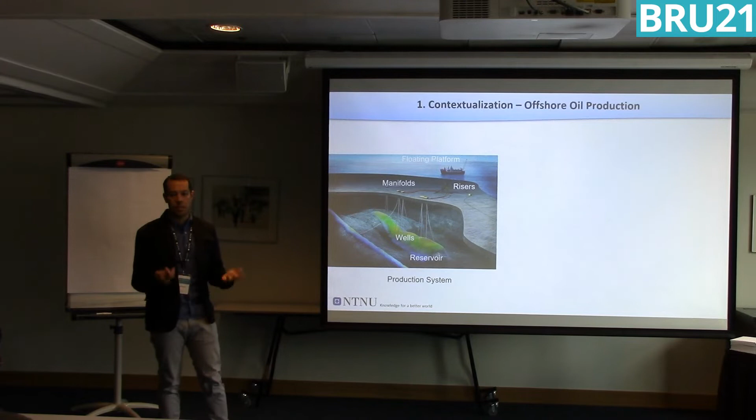Then the production is directed to the manifolds and to the pipelines, and then they flow up to the risers. There in the platform, there is the processing facilities, where the production is split into gas, oil, water, also for treatment, and so on. So this is more or less the production system. What we do, if you look at the schematic here, is try to represent how this looks like, and what sort of model we used to represent this.

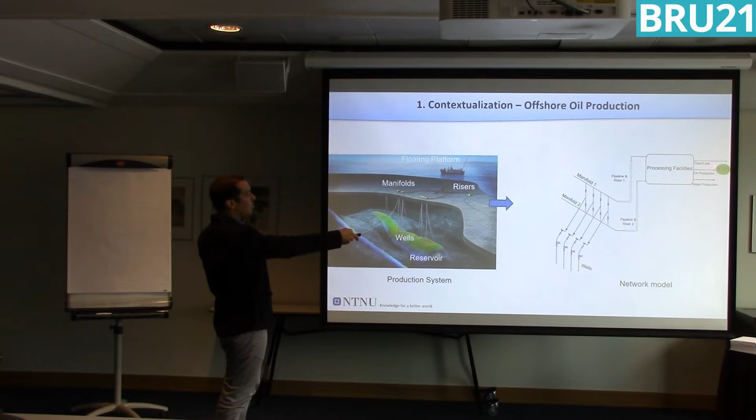We are basically looking at the network. We are assuming that there is a relationship between productivity, using IPRs to represent how the wells produce, and so on. Then all the network, all flows, etc., is represented by a bunch of pipelines and connections, like valves, etc. The overall goal is to maximize the oil production daily, which we represent with Y. Of course, you need to take care of constraints in the processing facilities, for example, water handling capacity, liquid handling capacity, and other constraints. That's more or less the scenario.

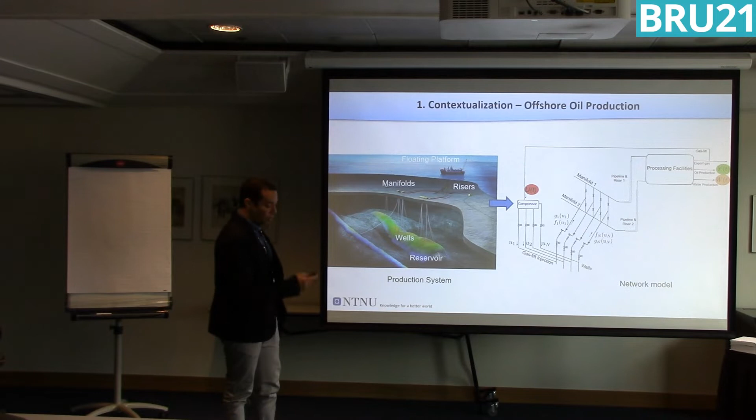In many situations, in many systems, what is done is that you extract a portion of the gas that you produce, and then you re-inject this gas into the wells. This process is called gas lift. It's an artificial lift mechanism to boost the production, or in some cases, even to enable the production. Then you basically have a compressor, and then you have the total gas, and you need to split the gas basically into the wells.

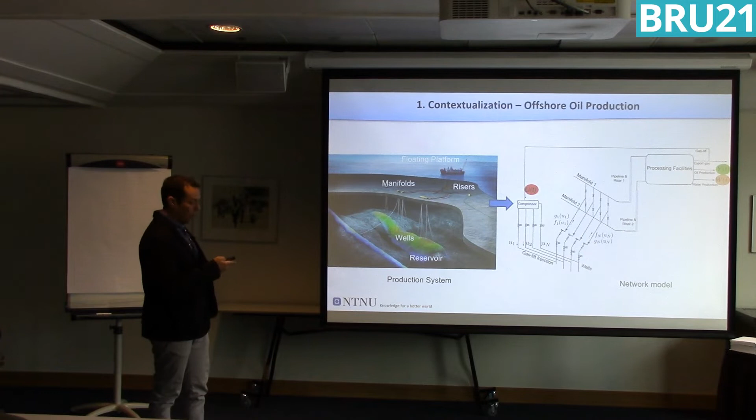If we look now into the problem formulation, what we want to achieve is basically how can we maximize the total oil production, given that you can, for example, steer the gas lift rates, how much to allocate of gas for each well. Of course, you need to respect the system constraints, for example, the water production that I just mentioned before. So this is a setup, and how to achieve that can basically be put in the framework of optimization.

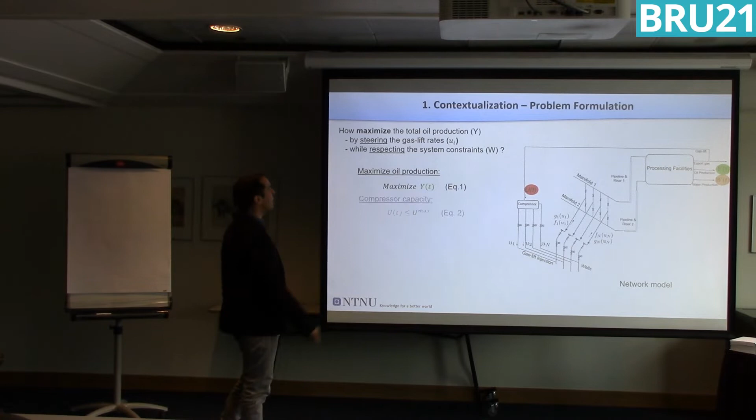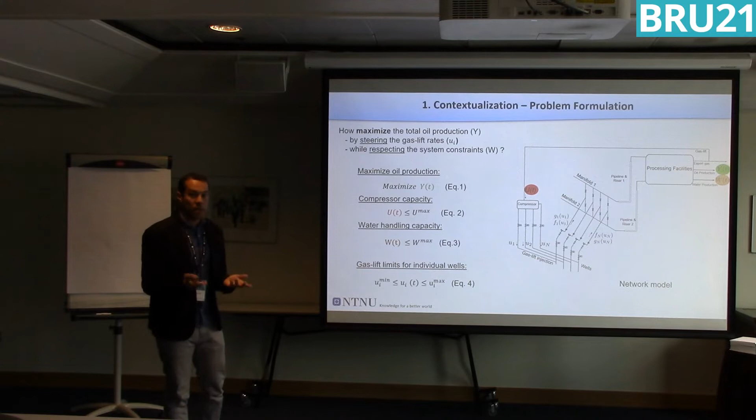You can frame it as an optimization problem. You basically have the objective to maximize Y of T, the total oil production. Then we have some limitations on the compressor—in this case, a maximum capacity of the compressor. We also have the water handling capacity, the total water that can be handled at the platform. And at the end, we have limits for each individual well. You cannot inject more or less; there is a region you should stay within, because if you inject less, you can produce sand, for example, or if you inject too much, you can wear the equipment. So there are physical limitations.

Before we go into the proposed method, what is the current state of the art? What you can do is, given the whole scenario, you have models to represent all of that, and you can do what-if analysis. This is really typical—you consider certain scenarios and test with your models to see what's the outcome. And then you can make use of first principle models.

You can also use data, but in a sense, it's all about trying and seeing what would be the outcome of a scenario, for example. And then you can also use optimization, but typically it's really hard to couple that with real-time data. And there are some spin-offs working on that, as we saw before. But I can't say that's standard technology being used yet, right?

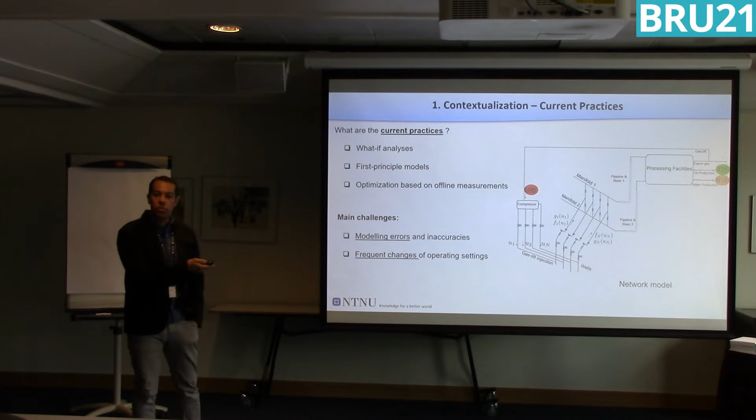And the main challenges in these practices are basically modeling errors. So you can build models, but it's really hard to maintain these models and to be sure that the accuracy of these models is good enough. It quite often happens that you find a good solution, but the operating conditions change, and then whatever you found before doesn't make sense anymore because you have a well that is clogged or whatever. So you need to take into account these changes in operating settings.

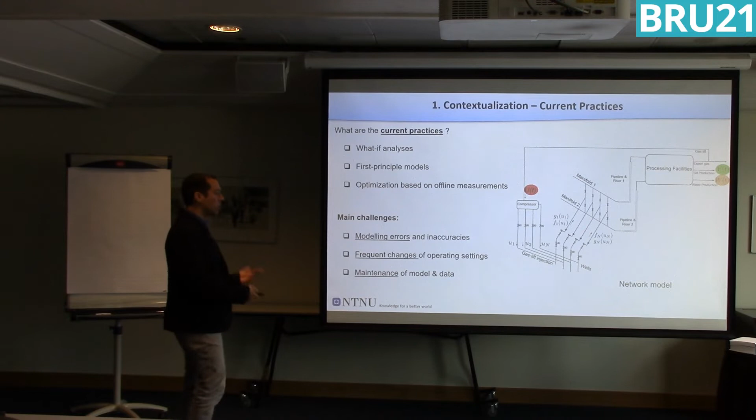And also, as I said before, maintenance of model and data, right? How to make sure that you always have up-to-date models. So these are the challenges, I would say. And now we go into the proposed solution in this work. We basically thought that we can use optimization, but we can try to avoid all the problems and issues that we presented before.

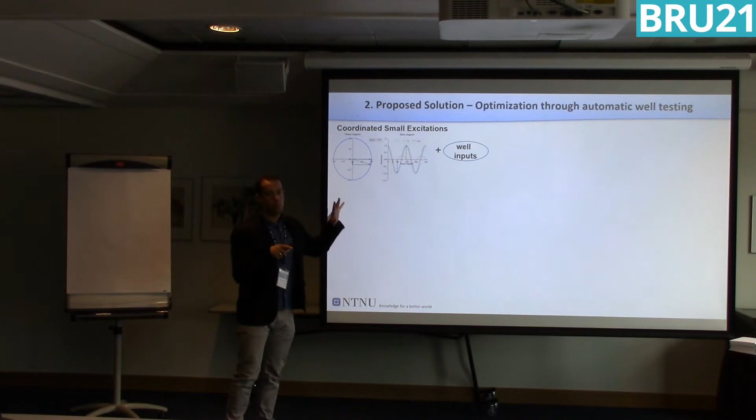So instead of using a model to represent how the system behaves, we decided to do something else. Let's try to use small excitations. And here I'm just showing some sinusoidal signals. And you can see that you have some degrees of freedom. Suppose you have one for each well, right? So depending on how you introduce the excitations, they can be coordinated in such a way that the total disturbance can be zero or near zero, right?

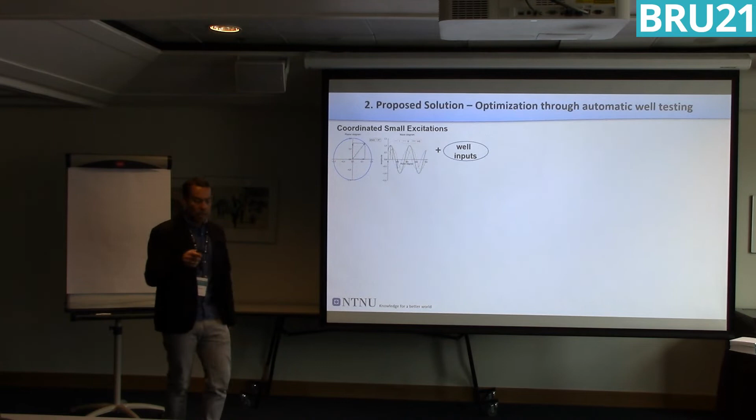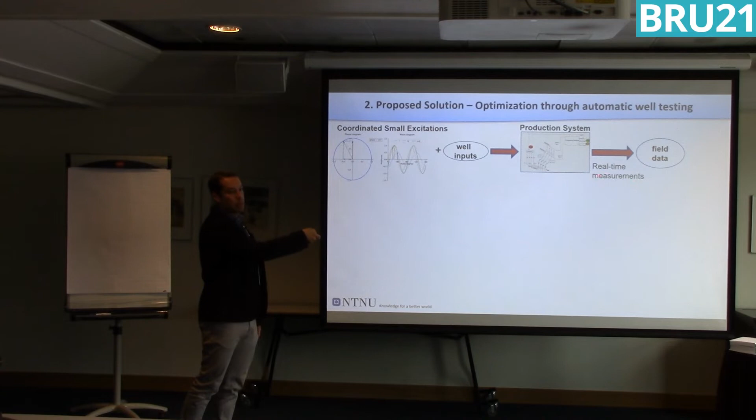And the whole point is that by adding some small excitations to well inputs, and applying that to the production system, when you have the real-time measurements in the system, then you have some field data that can be fed into an automatic optimizer. I'm not going to go into details here, but this optimizer can basically do adaptations in two ways. One is adapting the excitations themselves, and also the well inputs. And this whole thing doesn't depend on a model. So you are actually exciting the system, measuring, and moving. So that's the whole concept.

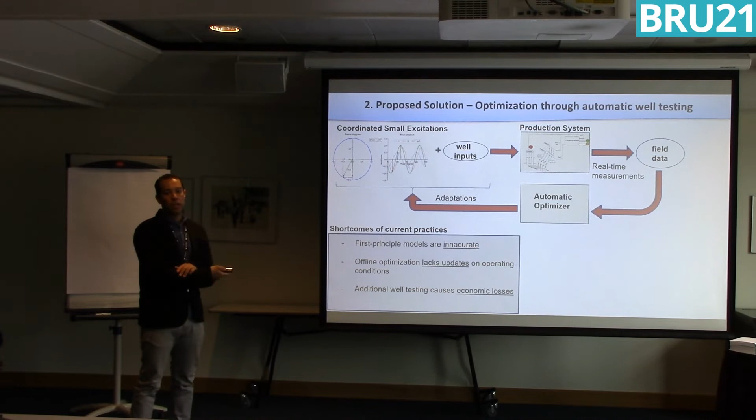And if you come back to the current practice, we argue that the models are inaccurate. It's hard to maintain everything up to date. And if you start doing more testing to get more data, then it's quite costly. You need to stop some wells and so on. And this is very challenging. So with the proposed solution, we argue that you don't need to stop your production system. You can do excitations continuously. And based on real-time data, you can do the optimization continuously without the need to stop.

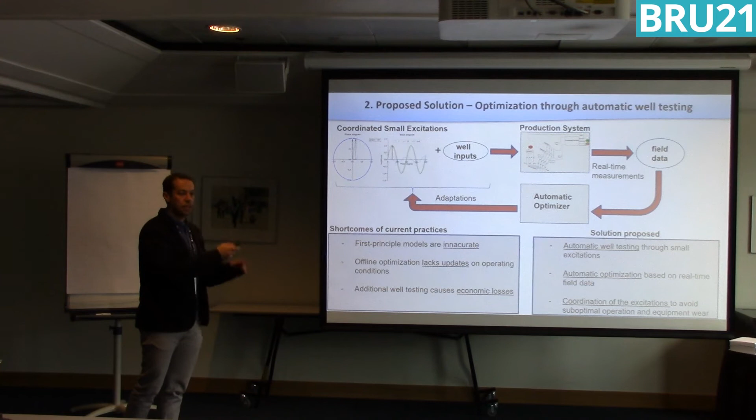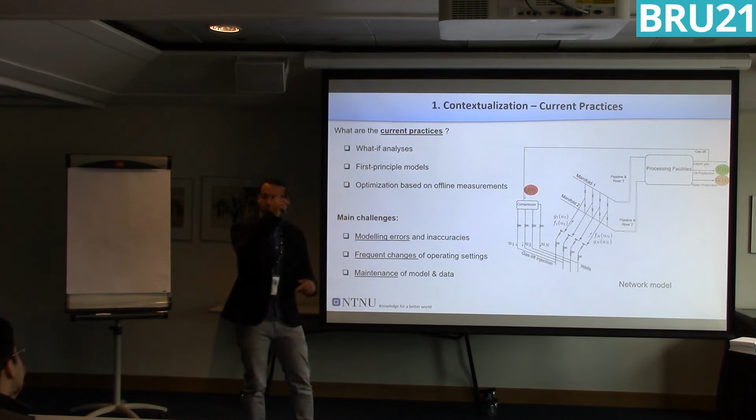And these excitations can cause some disturbance to the system. And what we did in this work is we found a way to coordinate this automatically, such that we don't have any big disturbance. So if you come back here, the main thing is that we cannot have big variations, especially for the compressor. If you have large variations in the input of the compressor, that can be a big problem for the platform. So we are trying to cancel out the total variations, right?

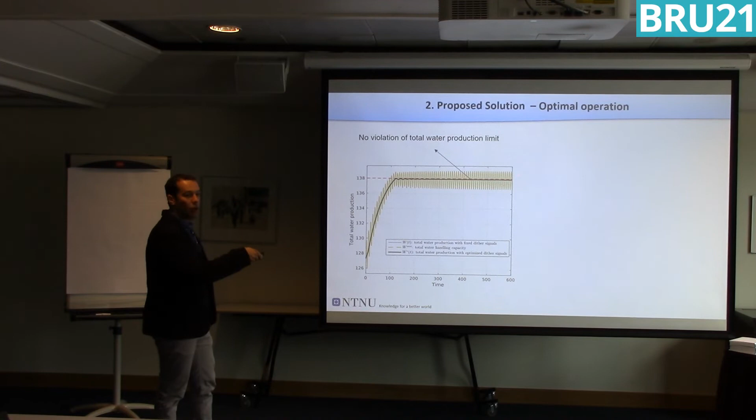And that's one advantage, because if you now plot the total oil production corresponding to this same situation, you see that a way to handle these variations is to decrease the production such that you have a margin. But if you do that, then that yields some economic loss because you're not operating near the optimum, right?

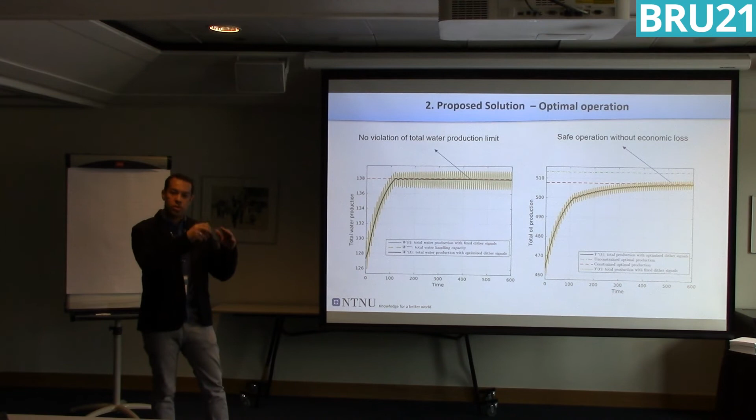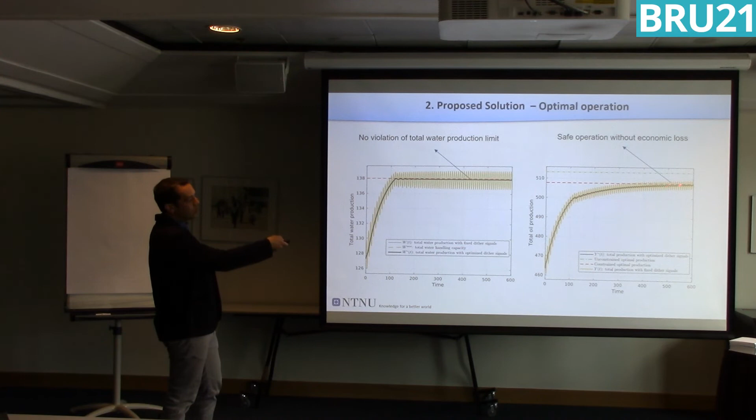You're decreasing the productivity such that you're on a safe place. But we argue that with this methodology you don't need to do that, because you are kind of canceling these excitations. And how that was done, as I said before, you can see the signals for all the systems, and they are quite different. You can see the amplitudes, for example, here and here, and also the phases, they are changing dynamically over time. Okay, that was the methodology that we used.

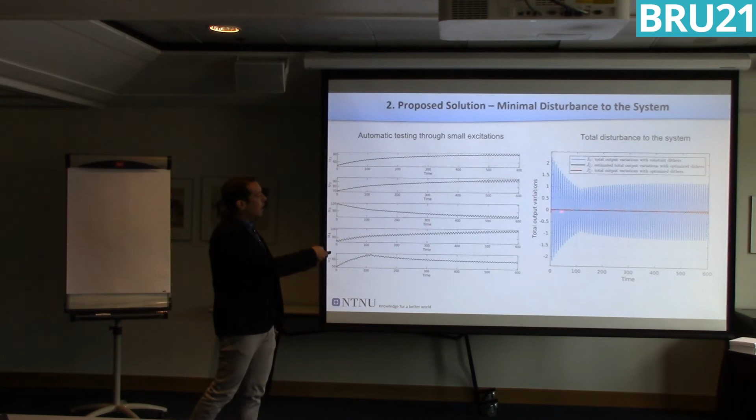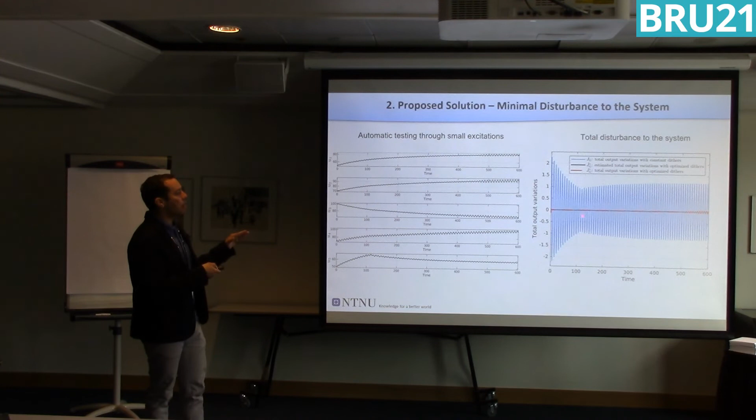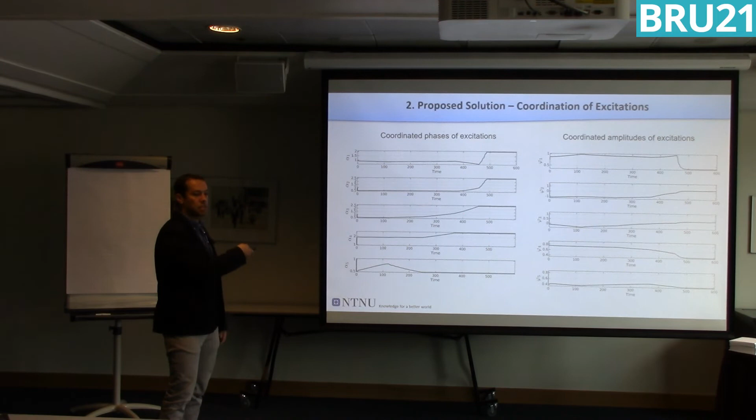And if you plot now the total disturbance to the system, then in blue here is the total variations with the standard method without any coordination. And this black and red line is basically what we achieved with this methodology. One is the estimated, what we estimated in the methodology. The other, the red one, is the actual measured data that we got. And that's how the phase and amplitudes of the sinusoidal signals look like. So there is some smooth and nice way of adapting that continuously, right?

So that was the work, and I can present some conclusions about what was done. So basically, we developed this methodology that can be applied. It was applied for a gas lift allocation problem. And it's basically what we call automatic well testing, because while you're doing these excitations to the system, you're at the same time testing, right? You're tracking changes in operating settings. And so you don't need to pay for additional tests, like stopping the plant and so on.

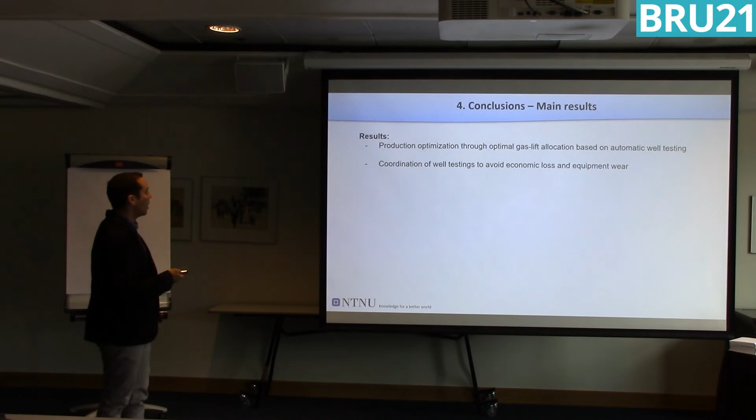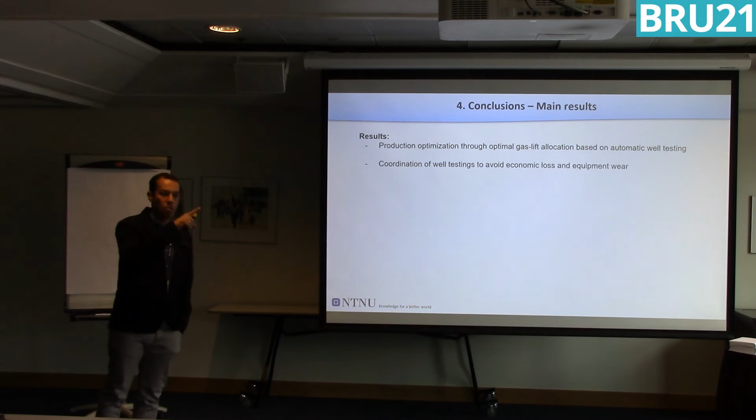And this coordination might then avoid economic losses because of these safety margins, and equipment wear, as I mentioned before, like the input in the compressor, for example. You cannot have these large variations happening. And also it allows you to operate very near to the constraints without being concerned about having violations and so on. So that's the result.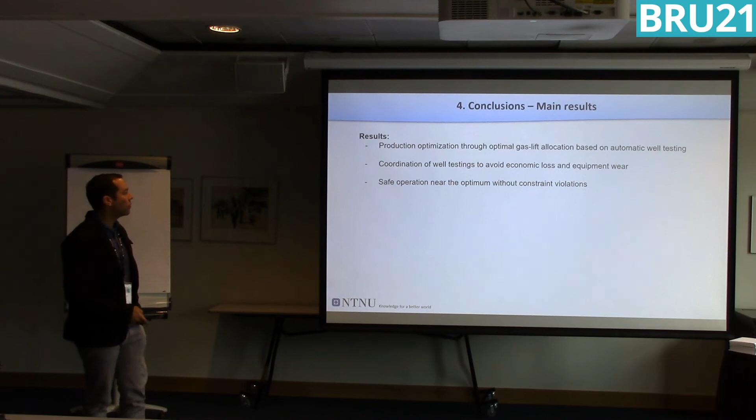During the postdoc, we published some works with the methodology if you're curious. The first was in ECC, the European Control Conference, in 2020. And that was more or less the beginning, right? Then we extended this for the constrained and more general case. And this was published in the IFAC World Congress. And I think this one is more mature. If you want to go to one, go to the second.

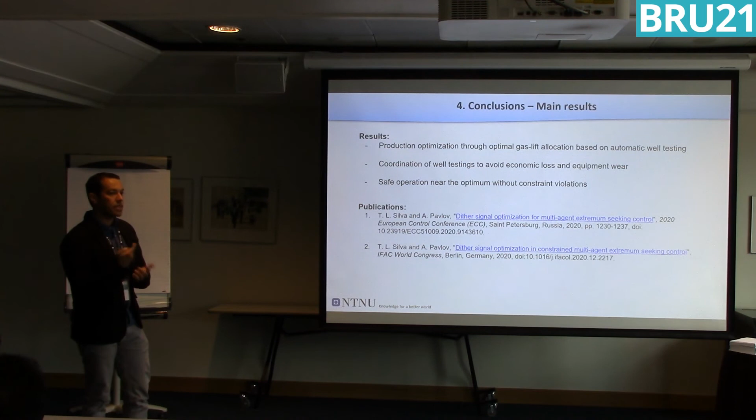And then we are continuing the work. I moved to SINTEF, but we still have this collaboration ongoing with Alexei here at NTNU and some other colleagues at SINTEF Digital. And then we published a third paper, which was led by this colleague graduated from cybernetics, Mark Haring, who is in SINTEF Digital, and we published this in a journal. And the main advantage of this one is that it's more computationally efficient. And we are working on the fourth one, another journal one that's more geometric. We found another solution that is better than the previous one. So that's more or less the academic results.

And then how I envision that being implemented, because this was not implemented in practice, these are still simulation-based results. So we need to have the possibility to automatically adjust the well controls, and that has to do with the actuators in the system. So if it's possible to change continuously the choke openings or gas lift rates, that would be possible to implement, right? So that's a requirement in a sense. And also we need to have real-time measurements to be able to estimate how the system looks and how to do the projections.

And of course we need another project to enable bringing this concept and all the results that we got in simulation towards more mature technology, right? So I think only with a project we can do that. And way forward, we have this project ongoing, in collaboration between NTNU and SINTEF, and that could be a way to continue the work. And there are other projects that are relevant and maybe connected to this that we could consider as extensions to the project.